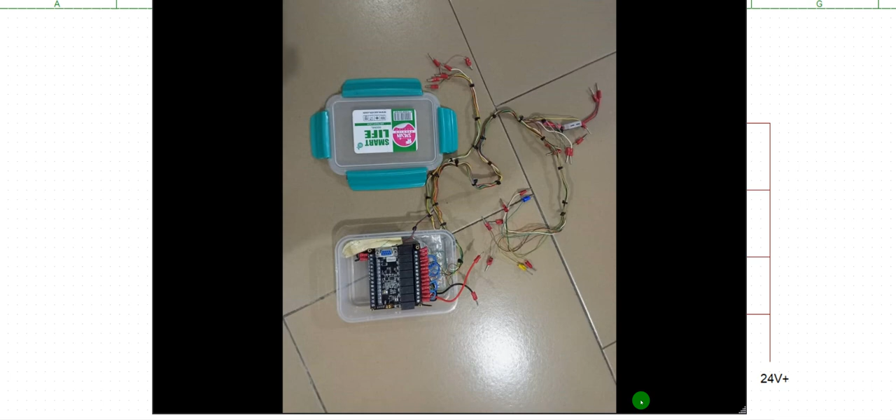This is what you need to get. You need to have a miniaturized PLC, a small PLC that is affordable. Okay, now this one is Mitsubishi PLC. All right. Now, the essence of you having this PLC is for you to design your program and simulate your program and also practicalize your program on PLC.

This is the reason why I said you need this requirement. You need all of this. You need laptop one. You need practice kit like this. You need PLC, small PLC that is affordable. This one is affordable. This one is very small.

Okay. Those of you that are very familiar with online purchase, go and Google Mitsubishi PLC. You will see a lot of smaller categories, miniaturized type. Okay, with $20 you can get these PLCs, the small miniaturized type of it. You need them. Please let me go back again. You need mini PLC for practice.

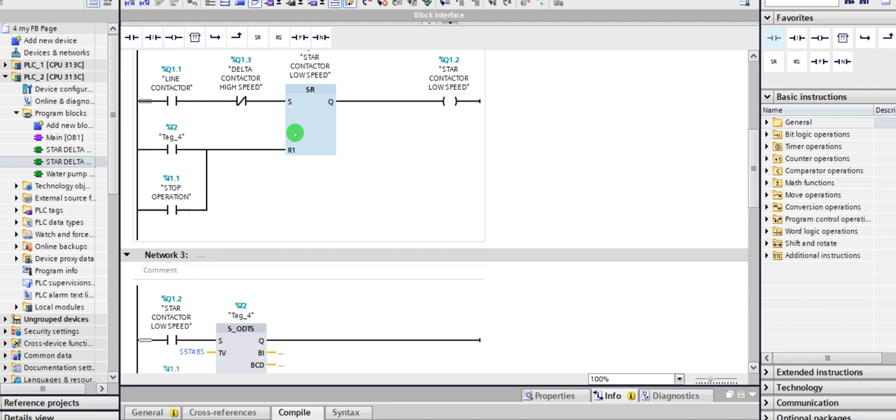Now, this PLC code, I wrote this one using SR flip-flop. Now, if you understand logic control, you understand about AND gate, NAND gate, XNOR, and so on. If you understand their function and configuration, I can use them to integrate so many working programs. If you understand the function of those logic arrangements, you understand this flip-flop function. Now, see what I did. This is just star delta. I use how many networks?

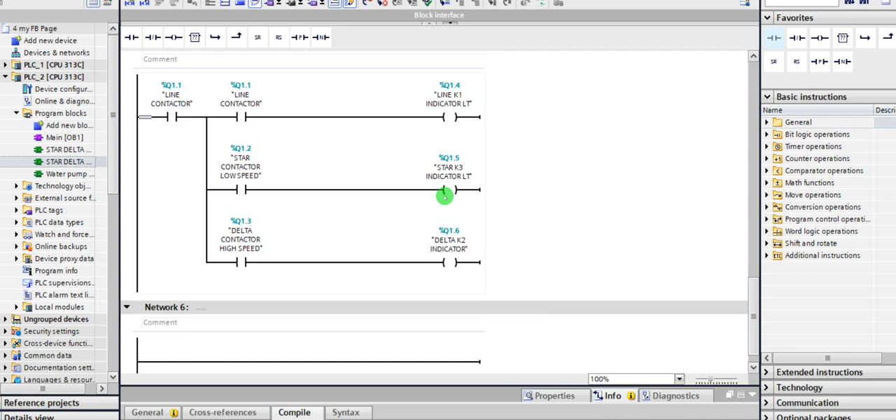1, 2, 3 network, 4, and lastly 5 network to write a star delta. Now, let me show you another program. That same star delta. This is a different star delta.

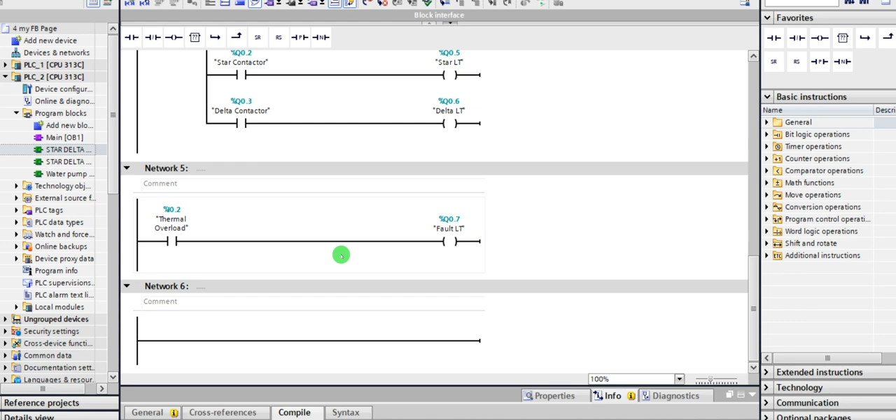How many network? 1, 2, 3, and lastly 4 network. Then I have, okay, I still have overload tripping network. This is my 5th network. That is when the system trips off, it will illuminate fault. So how many network I have? 5 network. Now look at this.

This is a different logic. The same operation sequence, exactly the same. Look at the coding, the bit is different. Check this one bit. Look at this one, how this one is represented. But they are speaking the same language. Their function, their operation sequence is exactly the same thing, but different coding logic.

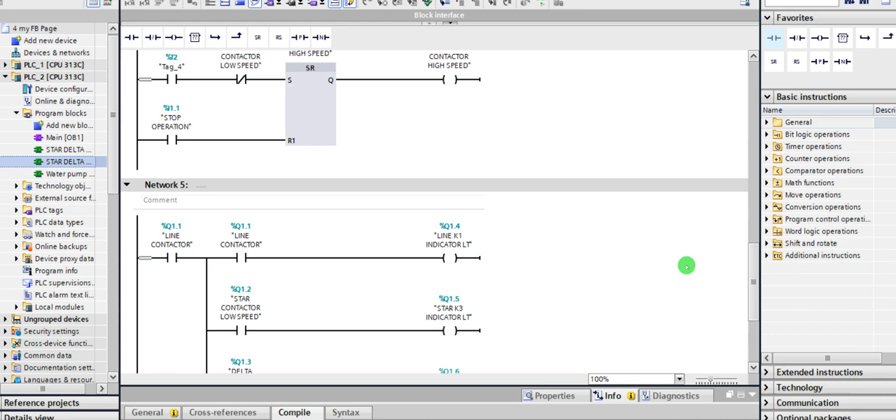Okay, this one I use flip-flop. The other one I use bit logic. I use normal bit logic to do this one instead of flip-flop. But the same star delta. Okay, let me take you back to control. Just pay attention, okay? Let me take you to control. All right. The same star delta is this, what I have here. Exactly what I have here is there.

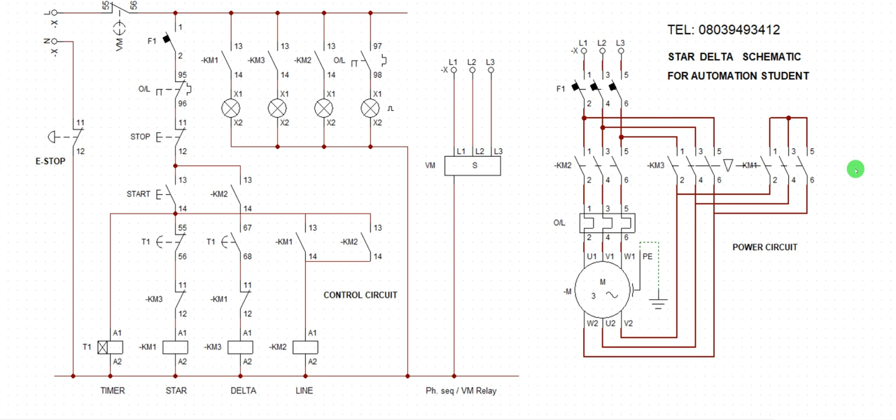Now, if you understand the operation sequence of this, there was a video I did where I convert ladder diagram with a schematic. Now, I did it in such a manner that each of these circuits, each of this logic is going to be represented by another, something like this. Just watch my video, you see this. I show you the difference between this NC and this other NC.

But if you don't have design concept, for you to recognize this in place of this, you find it difficult. Not even if you understand them and cram their symbol, their function. If I turn them the other way around to represent their function in another way you don't understand, you will get confused. But once you understand off and on, the logic of control, put this together to form this, if you understand it, there is no complex PLC that you will not understand. Then,

funny enough, let me shock you. Funny enough, let me say I want to build a factory where I'll be manufacturing bottled water. I want to build a factory for pure bottled water manufacturing. Now, the end user has to consult automation engineers, consult other clients that are good in industry setup. Now, engineers, automation engineer, electrical engineer, structural engineer, whatever, all of them will have a meeting in a round table.

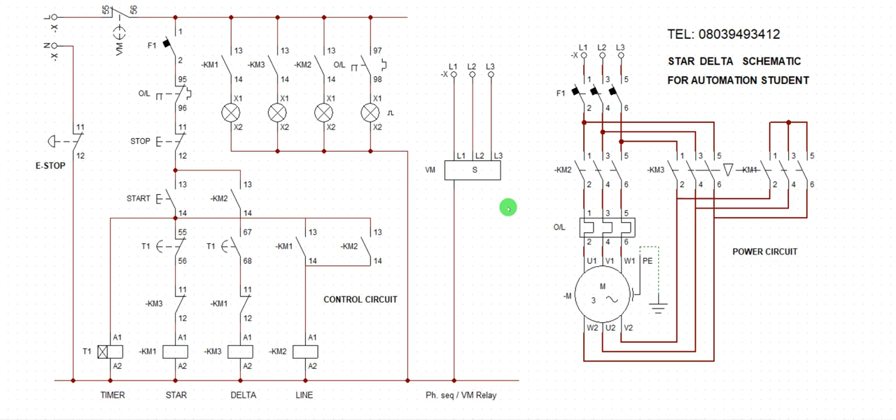Your primary objective coming into PLC is not writing this code. Writing code is not your primary objective. Your primary objective is to understand the operation sequence of your bit, operation sequence of your software, operation sequence of your hardware, operation sequence of your field devices. Once you understand them, writing this code is like ABCD. It's as simple as ABC.

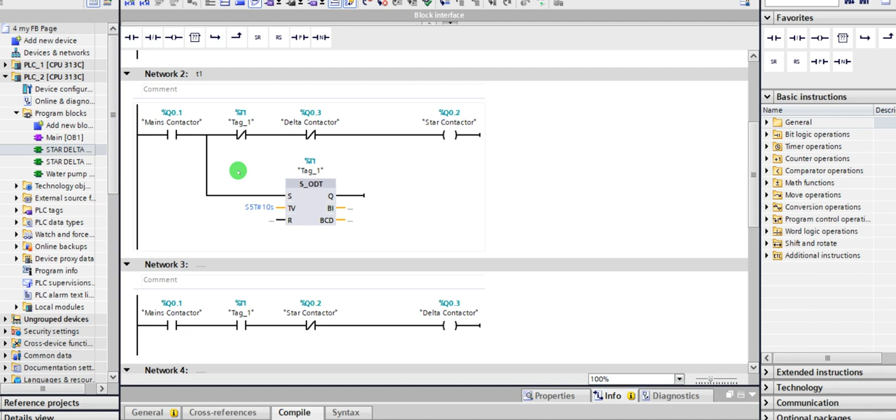For instance, let me change the narrative of this drawing. If this is a bottle water filling machine program, this network is for filling of the bottle. Now, I have another network here that will cork the bottle after filling the bottle. I have another logic here that will label, put my nameplate on the body of the bottle, that is the labeling machine. I have another one here that will perhaps count the number of bottles and wrap them according to their dozen base.

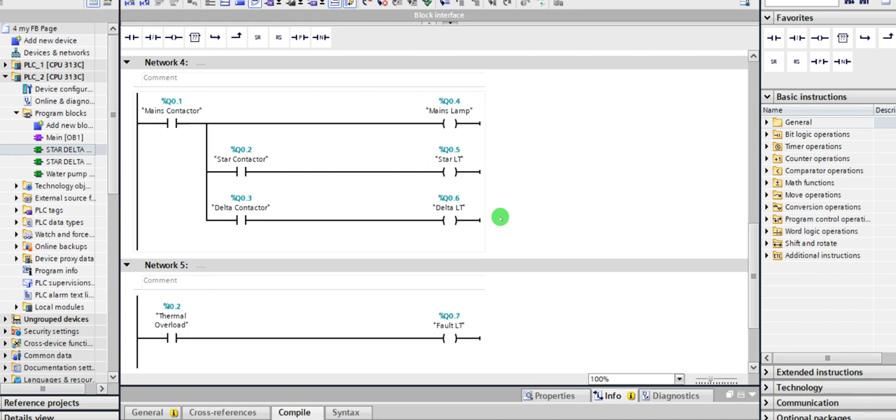Now, how do you write a program to synchronize the whole of this machine to work together in a sequential manner? How do you do that? You now have to write a program to link this, link that, link all, and generate a central base where they will be reporting. So that is what you're expected to do as an automation engineer.

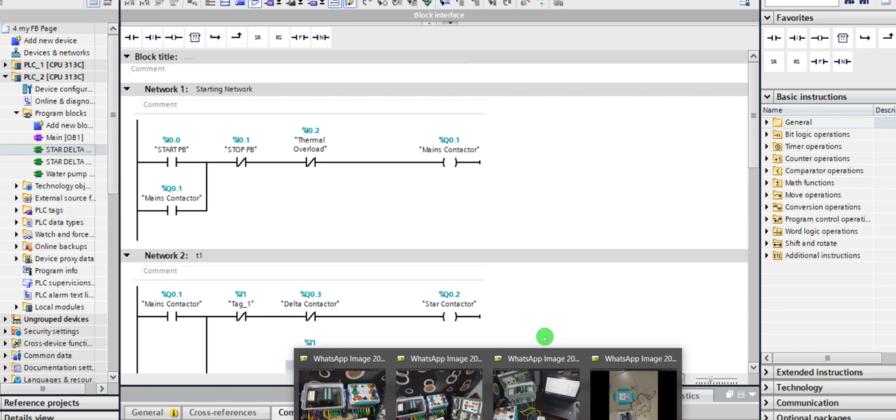I've given you one here. For you to be integrated into the system, you need this requirement. You need control skills. You need a mini PLC. Since you are so eager to write programs, you must need this because every day you must practice different code. In fact, in a week, I will give you no less than 10 different codes to write.

And each of that code, we have a method of connecting them, different connection, different code you have to write, and you have to connect them to your PLC. You have to simulate them. You have to also run them. Then when you are done with that, I'll give you another code to synchronize the previous one you've written with the current one. Both of them will be synchronized to give you a different function. Okay? So this is your PLC requirement.

Laptop, one; your workstation, two; you need a PLC, please. You need a mini PLC. Then you need to come with a series of control logic that you have to write. You have to write logic on control and understand the basic operation of control. You now write PLC to control your logic. Okay, so this is what I have for you for today.

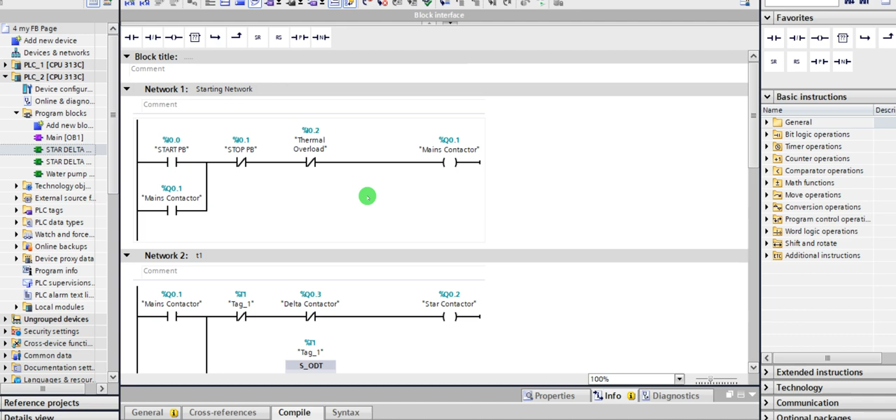So what I expect from you now is to understand the perspective I'm coming from. I will teach you automation. It's my calling. It's in my blood. I'll make sure you digest it. Every bit of automation, you must understand it. But you have to understand that you need these materials.

You need a PLC, no matter how small it is, whatever manufacturer, the one that you can afford with $20. You can get them for $25, $50, $100. You have different ranges, different types of PLC, the miniaturized type that you can practice with. If you are opportune to get the S7 300 series, fantastic. If you can afford Siemens LOGO, fantastic. But as a beginner, I will recommend a small one that is affordable without spending big money. Then as you advance and progress, you can buy a more advanced type. So this is what you need as a beginner in PLC.